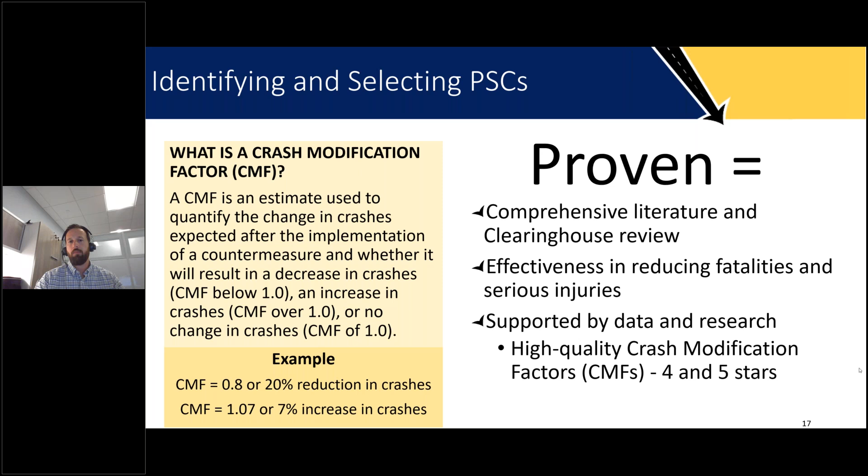For this reason, the Clearinghouse includes a system to indicate the dependability and quality of a CMF using a star rating system, on a scale of 1 to 5 — the more stars, the better quality the CMF. So for this set of countermeasures, we focus on high quality CMFs, those with 4 and 5 star ratings, which indicates they were developed through strong quality research.

Now, the PSCs align with and can support agencies with implementation of the safe system principles and elements. On the left side of the slide here, you'll see the Federal Highway developed Safe System wheel. On the inside of the circle, we have the 5 safe system elements, and on the outer ring are the 6 safe system principles.

Now, if we start to look at a few of the principles, we use this Swiss cheese model or analogy to show how the 5 safe system elements work together, such that if one part fails, there are redundant systems in place. So if we think of each of the 5 safe system elements represented as its own individual slice of Swiss cheese, the holes represent weaknesses in the individual parts of the system.

A failure — or in our case here, a fatality or serious injury crash — can only result when the hole in each slice momentarily aligns, permitting a user to pass through all the holes in the slices.

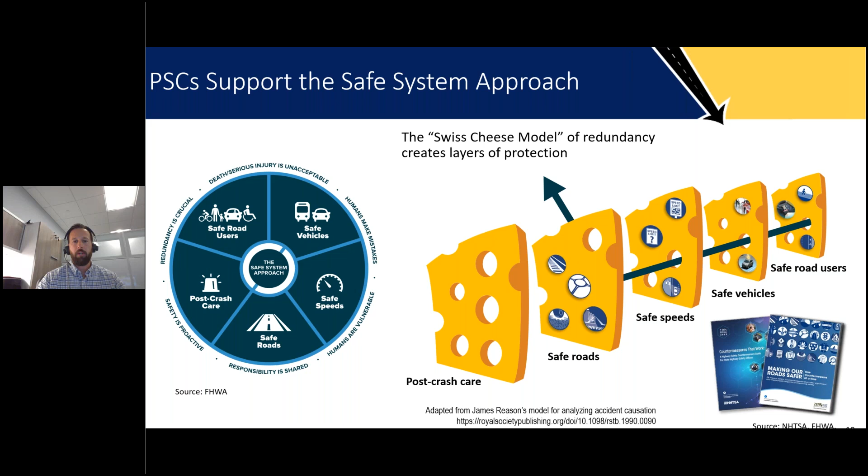So we have our proven safety countermeasures, and NHTSA has their Countermeasures That Work series. We can use these and implement them to further strengthen each of the individual elements. And if we implement those countermeasures within each of the elements, we can start to plug the holes in the cheese — plug the weaknesses in the system — to reduce the risk of a fatality or serious injury from occurring.

Now, understanding these agency challenges, recognizing the initiative now contains 28 countermeasures, we wanted to make sure we were providing the right tools and products to help practitioners find the right solution to their issues. 28 can be quite overwhelming to some agencies, and so with the most recent update we reorganized our web page for the PSCs by each of the different focus areas we have.

We also added a search and filter tool to the web page to narrow down that list based on a number of different factors that can be selected in that filter tool. And one of the staples of this initiative are our one-page fact sheets, giving a general overview of what the countermeasure is, the safety effectiveness, the applications, and considerations when implementing the countermeasure.

But we've also implemented and developed a number of other resources. We put a booklet together that puts all 28 fact sheets under one cover. We have a document that we rolled out earlier this year highlighting rural applications of proven safety countermeasures.

And just this week, we posted a new guide, so you can ignore the coming soon. I'll post a link in the chat once I finish up here. This new guide is on implementing the proven safety countermeasures in work zones. It describes the application of the safe system principles to work zone planning and design, and explains the policy and project level implementation strategies to consider and prioritize PSCs in work zones.

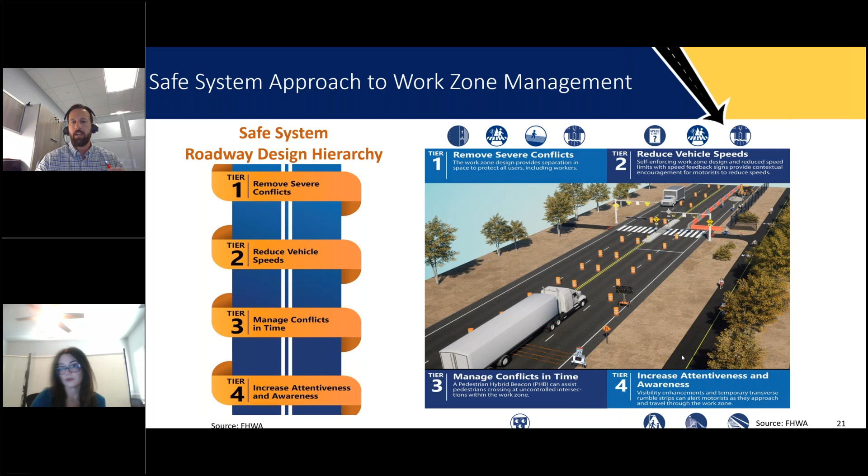Now, there are a number of different strategies that can be used to implement PSCs from both a policy level and a project level. We have a lot of policies, procedures, and guidelines that are developed and can inform countermeasure selection and mitigation within work zones. Encourage you to look through those.

Work zone process reviews, the capability maturity framework. Each state's required to develop a strategic highway safety plan. Many states include an emphasis area for work zones. Look through the other emphasis areas to determine what are the primary safety issues in your state and how the PSCs can be used to support and address those different strategies that are identified in the SHSP.

And then last, in the policy level, and probably should be first in this list, is to review work zone crash data. Look at the most common crash types and scenarios that account for fatalities and serious injuries in your work zones. And then down to the project level, we have work zone road safety audits.

Those can be performed at any phase of a work zone, whether it be planning, design, deployment, during active work zones. The graphic in the top right shows those 8 major steps of an RSA.

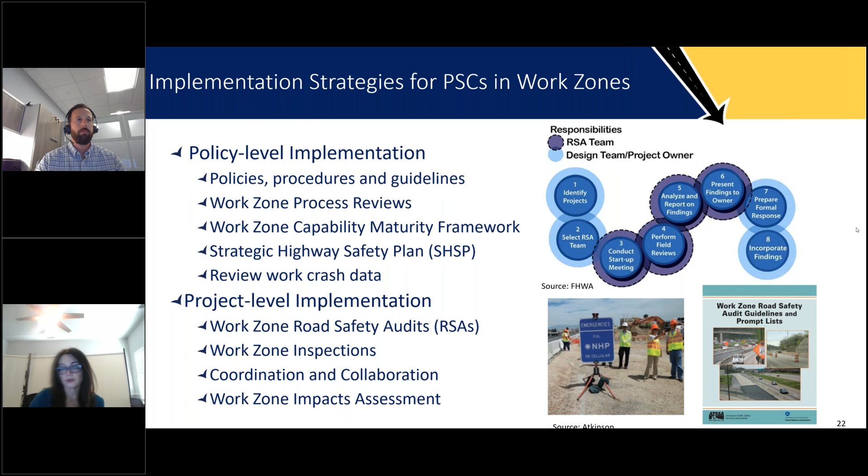And we have work zone inspections. There's a lot of opportunities for coordination, collaboration between the different project stakeholders, and then work zone impacts assessment. So you can see a lot of different opportunities to explore how PSCs can be considered and implemented in work zones. And then the bulk of the guide, as I noted, goes through each of the 28 PSCs.

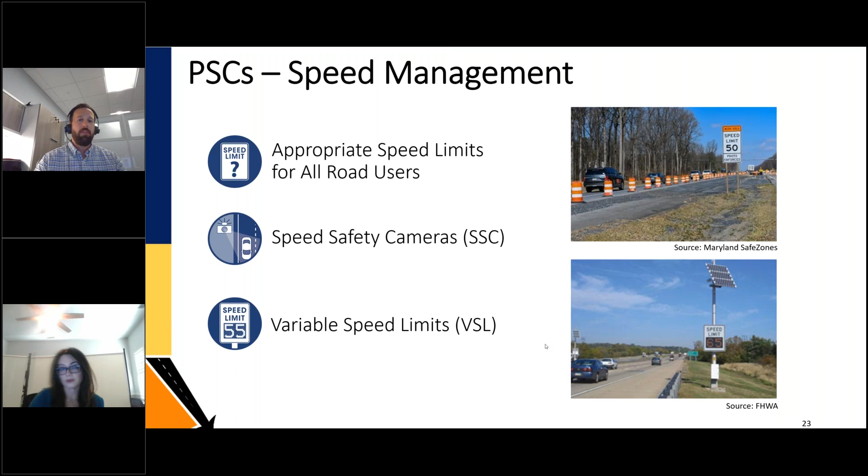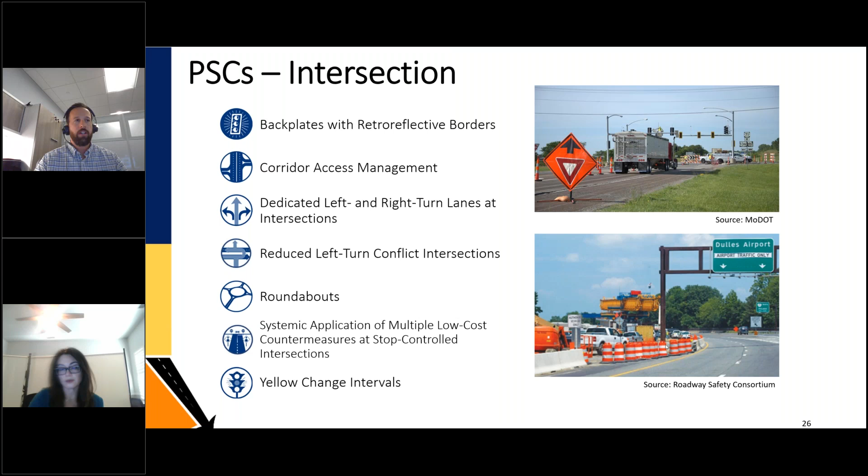I'm not going to go through each of them in any level of detail, but just wanted to highlight by focus area what we have. 3 PSCs under the speed management grouping. We have 8 PSCs under the PED bike focus area, 6 under roadway departure, 7 under intersection, and then our last grouping includes 4 cross-cutting PSCs.

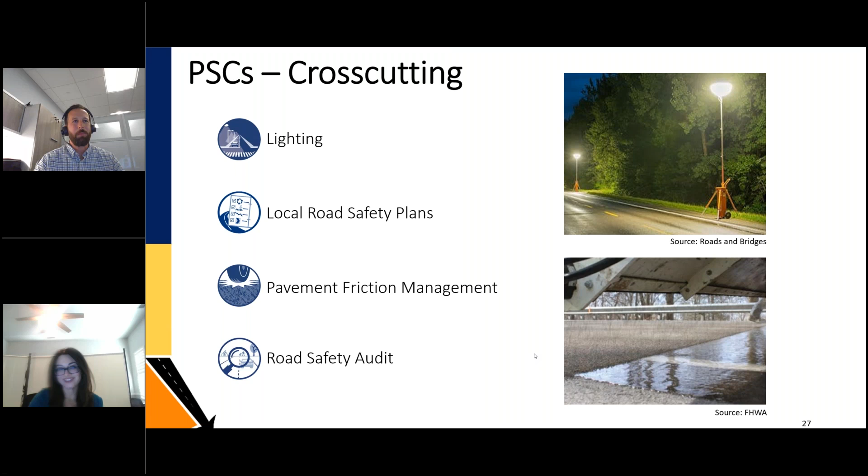I had underestimated how much time I'd given myself for the presentation, so I had a note I was going to kind of touch on one within each grouping, but in the interest of time and allowing Florencia and Chris to cover ample time to cover their material, I was just going to skip over that.

And I just wanted to kind of close with this: where to start. The guide contains a lot of information on where you can start with in terms of considering and prioritizing PSCs for implementation in work zones. Going to note just a few things here.

Look at where you are at in terms of implementation. So you can use a scale. We have the Every Day Counts scale from not implemented all the way up to institutionalized. If you're at those lower tiers of implementation, what are the barriers to implementing PSCs within your state? What do your state policies say about the proven safety countermeasures?

Looking at leveraging and reviewing and utilizing a lot of the existing information we have. Touched on the strategic highway safety plan. Look at work zone crash data trends. There's a lot of information that's already complete and available and can inform PSC implementation in work zones.

And then lastly on the slide here, I have funding. It always comes up under BIL. We do have the work zone safety contingency funds. Those may be available to address those unexpected safety concerns in work zones. So I have a link to a fact sheet that was developed just recently. Encourage you to look at that and how it might support PSC implementation in work zones.

And then lastly, I think it goes without saying, we are here to help. If there's anything we can do to support you, let us know. And then I had this final graphic basically to show we have a lot of tools at our disposal, a lot of methods, tools to inform countermeasure selection or decision-making at the project level that we all have a role in delivering. Those tools can better allow us to target investments, implementation of the PSCs, all in support of our goal of 0 deaths and serious injuries in our transportation system.

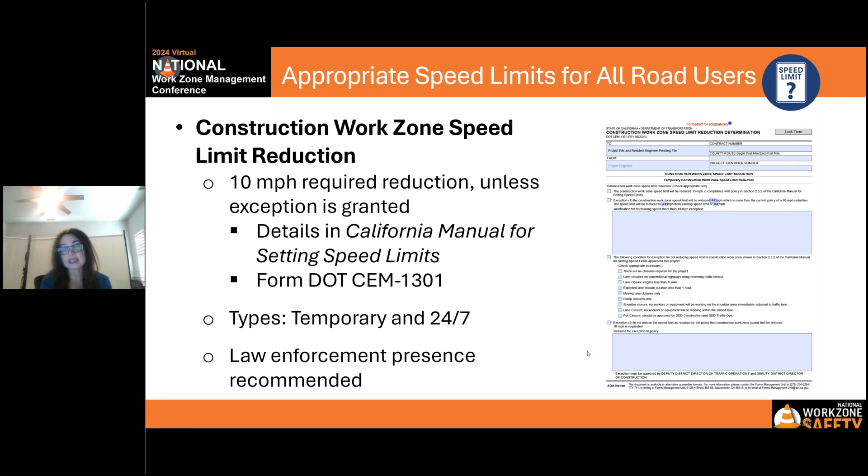One way to enforce this is by law enforcement presence. So we have in our state what's called COZEEP and MAZEEP. We actually have a contract with our local California Highway Patrol for both COZEEP and MAZEEP, the Construction Zone Enhanced Enforcement Program and Maintenance Zone Enhanced Enforcement Program. And we have funds set aside specifically for all projects to be able to have officers on site at all times. We revisit that and create a new agreement with them every 3 years.

And we call out specific times that it's mandatory that you will have a COZEEP or MAZEEP officer present at night during specific times. We will get with them and say we feel it's necessary. That's not the only time they could request it. We have funds available, so on any single job, if we feel it's necessary, we ask for COZEEP or MAZEEP. The RE will be out there and work with them, and it could look different on every single job. One, we just may need their presence.

We just may need them to drive through, make sure they're really enforcing appropriate speed limits, make sure there's no violations, make sure, just see them there. Some speed may be an issue. We may say, okay, we need you to get your LiDAR done. We need you to check speeds, be a little bit more proactive. Throughout the entirety of the job, that could change.

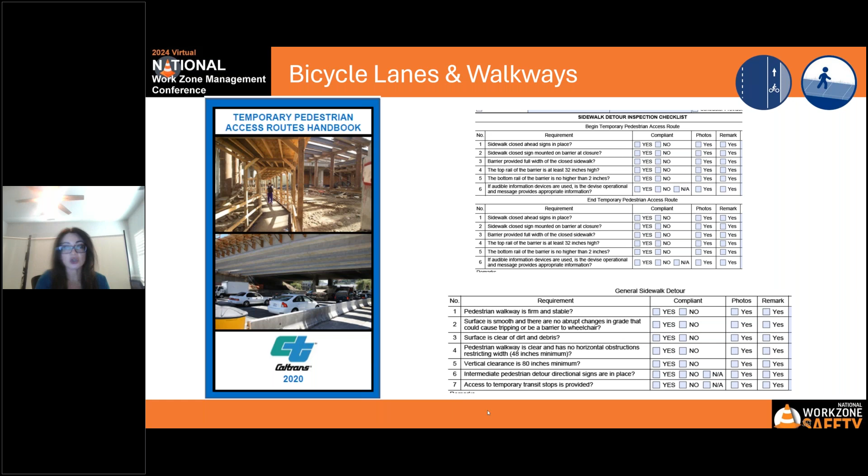What we decided to do is, hey, we're ignoring our bicyclists. So let's create a temporary bicycle accommodation guideline as well. And before, with our bike lanes, if there was a specific bike lane called out, then during early stages, the project engineer would see that and be like, okay, well, there's an actual bike lane. So now we have to provide another bike lane on this project. So it was really just case by case. If there's a bike lane, we're going to look at bikes. If not, then we don't have to do anything. So we're trying to change that.

And this guideline is supposed to come out mid-summer next year, 2025. And what this is going to do is every single project, regardless if there's a bike lane or not, let's look at it for bicycle accommodation. So we want to make sure that we are looking at all of our vulnerable road users, whether or not they had an existing bike lane. Are there bikes in the area? Do we see people utilizing them? Even if there's a few, what are we going to do to get them through?

There doesn't necessarily have to be a called-out bike lane for them. It could be maybe just a bike path. We want to make sure that they could get through. And sometimes there isn't a way to provide a detour. What else can we do? Can we provide a shuttle for bicyclists?

This was a really big thing because especially a lot of avid bicyclists, they have really expensive bikes. They don't want to use a shuttle. What can we do to help get them from point A to point B? What type of bicyclists do we have that we're trying to accommodate?

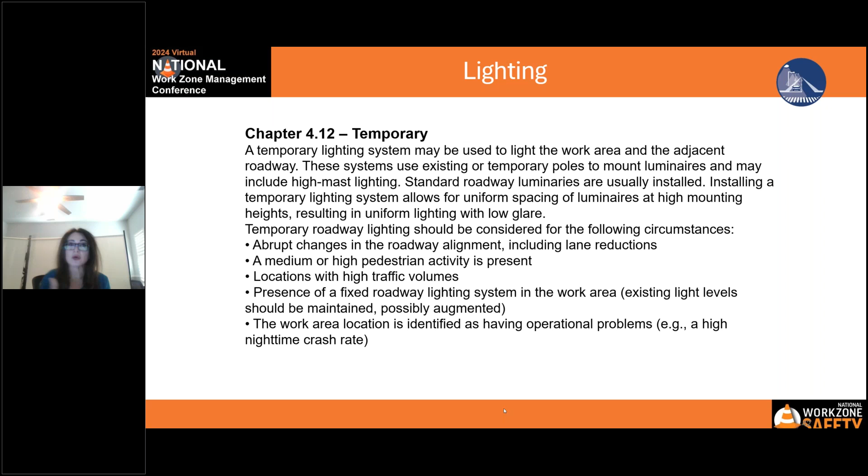So in this project, the traffic was temporarily shifted into the median, which was fine, and it was near the off ramp, and we kept the ramp open, and that ramp stayed illuminated, so it was fine. But what was caught is, well, once you do the realignment, you're now going to create a shift in the divergence point. So we need to illuminate that. How are we going to do it?

So we had to work with electrical to make sure, obviously, we wanted the same levels of lighting in that temporary area that we had in the permanent area that remained open. So in this case, we had to have lighting on wood poles, and we just installed them right there at the temporary divergence point, and everything was right and dandy. But that's just an example.

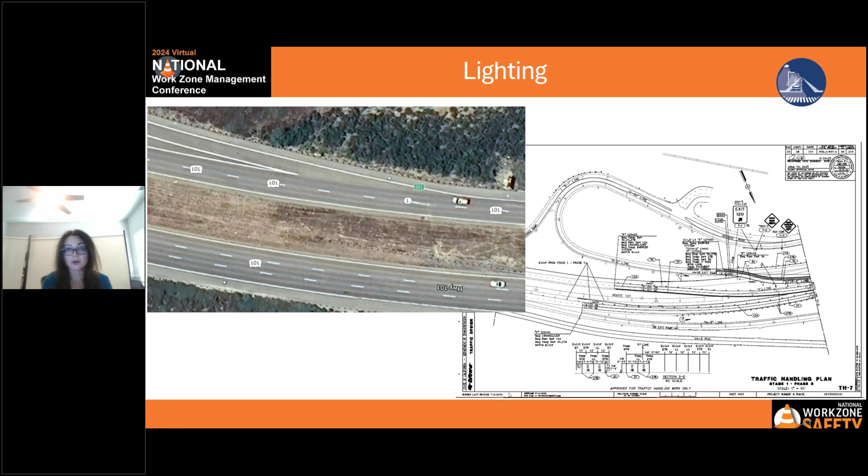What we do is we look at every single project, whether it be temporary or permanent, and we really try to make sure that we're getting the right people involved to keep these proven safety countermeasures intact. So thank you.

All righty. Well, thank you for leading those off. So I'm gonna kind of finish it up and close it up here. One of the things that I wanted to do was really get into some of those practical examples and really show how and what we've done in Michigan with those. So it's going to be a little bit more of a lightning round overview of all the things that we've done.

Some of the things that I'm going to try to cover today are some of the things that we've done with our temporary pavement markings. We'll focus on those a little bit. We've done some different things with traffic regulating or flagging, looking at AFADs, some different things about locations and where to stand. Getting into some of the rumble strips and showing some different applications of how we use those in Michigan. And then just some other general things that all tie in to the proven safety countermeasures idea. They may not be directly listed, but they're simple low-hanging fruit things that really do add that safety.

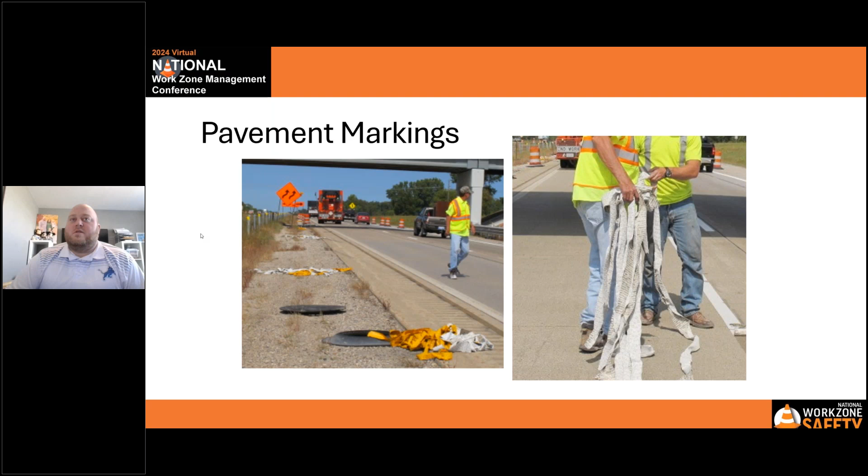So we really looked at that, and our contractor challenged us to challenge industry to come up with some new tape. We did a couple of tests side by side, and as you can see in the picture, we had them out there, and the improved tape, which has a little more of what they call scrim or internal webbing, really lasted longer in areas like this where we have roadway defects—crack sealing, gaps, joints, things like that—where normally someone pulling this up would have to stop and deal with it.

There are a lot of videos online—if you Google that, or email me, I can get you some. For the sake of time I didn't want to put one in here, but we were on a project and found how much faster this tape removal goes. When we extrapolated that out, improving this tape and speeding up removability meant, for example, 10,000 feet that would take about 3 hours to peel with our old tape was reduced to about 30 minutes.

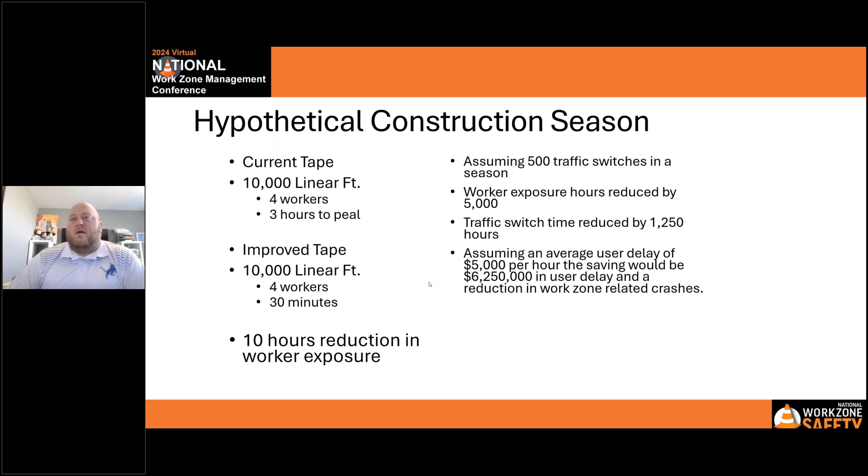So we're reducing worker exposure and the time we're out there with lane closures. We figured that if we were doing 500 traffic switches a season—which is probably low considering all the work we're doing fixing the roads here in Michigan—that reduction extrapolates to over $6 million in savings, just in user delay cost from having traffic move, not to mention the reduced worker exposure and the risk of not getting hurt and not being exposed to traffic. So that improved removability tape is something we're really proud of at Michigan; we've had it in place for a couple seasons now and have seen a really big reduction.

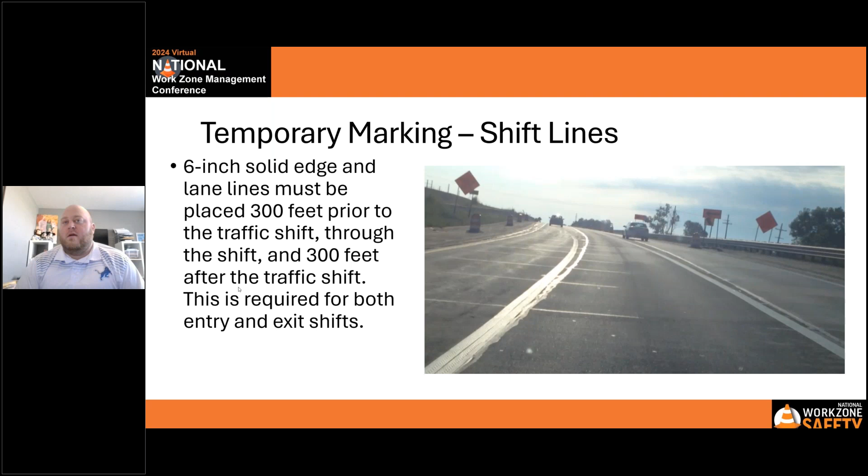This is one we missed in the design because it was still kind of new, but it did a really good job of highlighting what it looks like when it's not there versus when it is. It's kind of an unnoticed thing, but it really prevents side swipe crashes at merge points, and allowing people to stay in the lane really adds a lot of benefit.

A super simple one, but very effective, is signing your access points. We sign things for the motorist and general public, but a lot of times how our construction staff get around on our projects can be difficult. We have a lot of trucks coming in and out of our projects, so on some of these that are maybe 5-10 miles long, we put up access point signing.

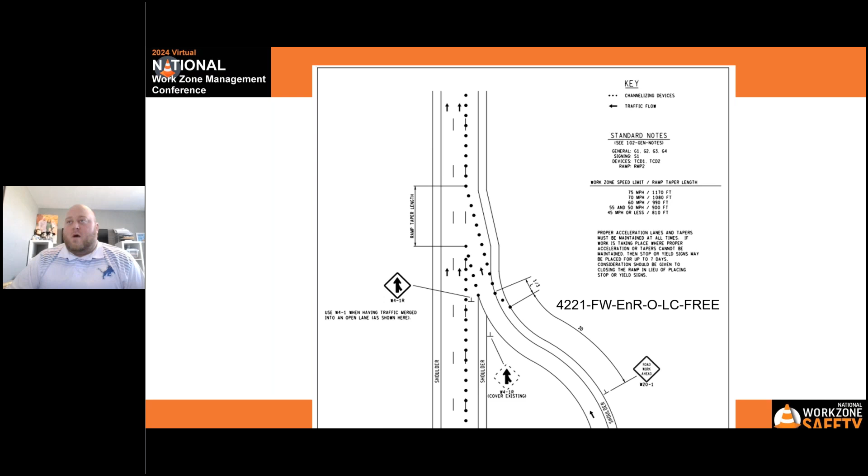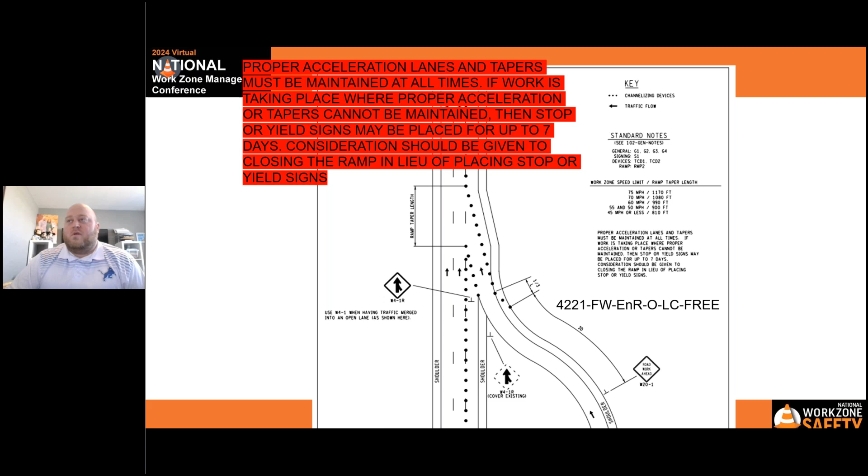How we handle our freeway entrance ramps is one we really worked a lot on, making sure and driving this point home that we have this in place. We actually state that if you can't have a proper acceleration lane and you do need a stop or yield sign, we should give consideration and think about closing that ramp for a period of time prior to doing that. We always want to try to get that work done and not have a stop or yield up for longer than 7 days if we do need that in some circumstances. But in those cases, we would try to close it and avoid it.

The reason being is we saw a lot of things like this where you're yielding on, you're merging on, and really there's no work going on, so there's no reason to have this closed. They could have built in that taper and matched the existing conditions, giving motorists those distances, because when you don't do that, even if you have it signed properly with yield aheads and things like that, if you don't give them enough space, you still run into the issue of crashes that can occur at points like this.

So just making sure, it's not a direct proven safety countermeasure, but making sure we're designing our ramps correctly and giving enough space is definitely something we can do to make our work zone that much safer.

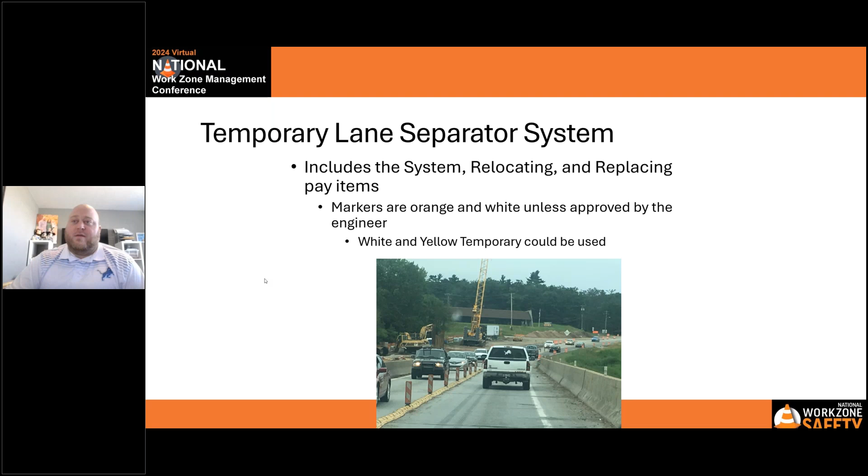Up in the Upper Peninsula, across US 2 in the Escanaba area, we had this out there for multiple seasons and also had to remove snow around it. What we realized is it still functioned over the wintertime. The snowplow drivers just stayed a little bit away from it and really salted that. But that really worked, since we had a railroad bridge that was a multi-year project and we really had to maintain traffic over there, so this allowed us to keep that traffic separated using this system.

This is also something we've utilized on other bridge projects, or just in areas with a lot of high volume where there might be potential intrusions into the work zone, and you just want that little bit of added protection that really does give you a more defined area where motorists can't necessarily cut through. They can still cut through because those delineators pop down, and they pop back up if they get hit, but it doesn't promote it as much as a space between a drum where someone can try to pull into the parking lot.

Simple but effective, reflective stripes on your temporary signs. A lot of times you're out there at night and may not see or be aware of those. Just putting those reflective strips on those panels really does make those signs a lot more visible.

And then rumble strips. We have a couple different ways that we use temporary rumble strips. If we're ever changing a stop condition, we have a layout for that. So if we have a temporary detour route and need to change a free-flow intersection to a stop condition, we really want to make sure we're alerting those motorists, especially ones that have been driving there for years and never stopped at this intersection. All of a sudden, for the next 3 months, they have to stop there. We're changing the traffic pattern, and this really does a good job of highlighting that.

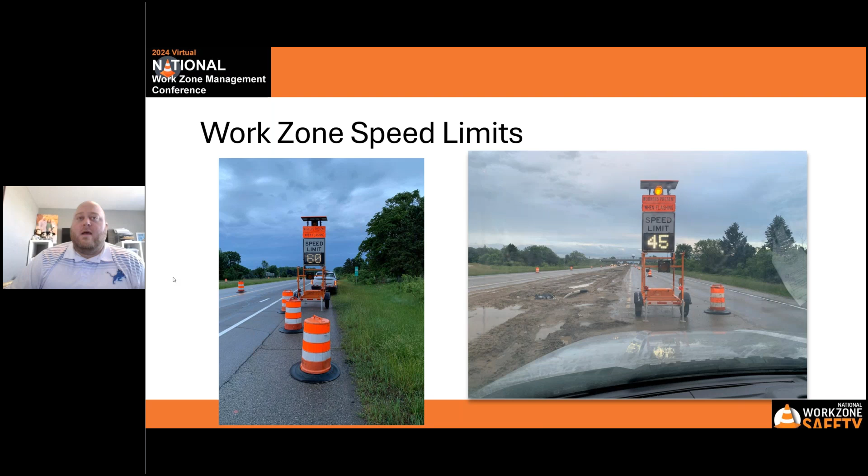Getting into speed limits—Valencia touched on this a little bit. One thing we're doing specifically in Michigan is a workers-present speed limit, and there's always a big discussion about whether the workers are actually there: when do I have to slow down, when do I not? So we're looking at utilizing digital speed limits with flashing lights when workers are present, to really help improve compliance.

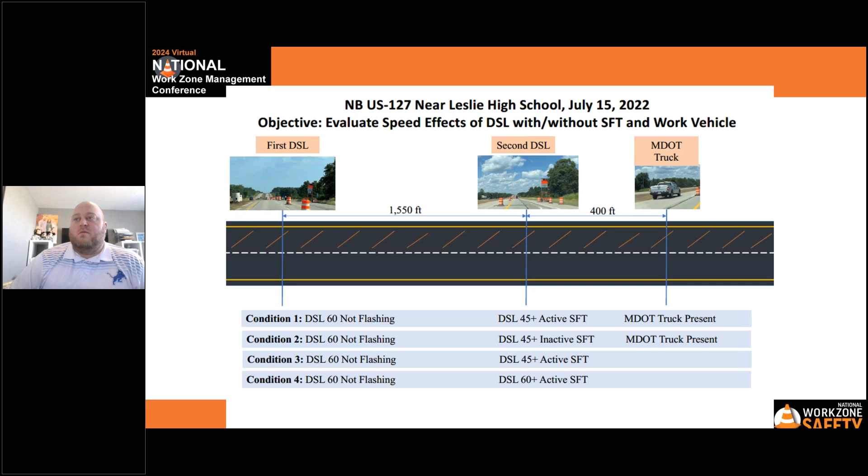We actually did a study on this through the Smart Work Zone Deployment Initiative, or SWZDI, and Michigan State helped us out with it. We looked at having these out there and how effective they are in relation to actual speeds. What we realized is that when they're out there and there was a work truck with a light on, we saw a higher rate of motorist compliance slowing down to that speed. They're not getting all the way down to 45, but comparing when the DSL was active without a truck present versus when there was an actual worker there, you can see how effective those signs were versus just being out there on their own. So we saw a lot of positives with that, and we're working on exploring it further.

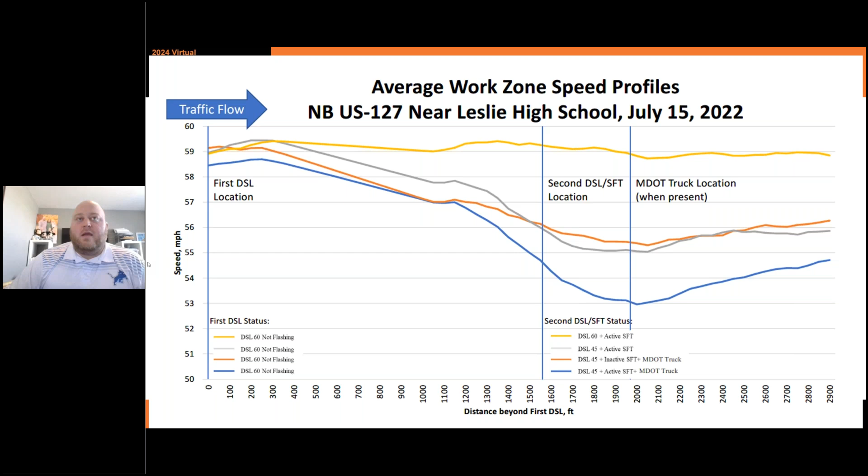So we do have some upcoming items with that.

And then too, just as we highlight the speed safety cameras, I know this was talked about by Martha, Juan, and Kyle on the first day, but this is something we haven't been able to do yet in Michigan. We're still working on some legislation, but the numbers on those cut sheets that Phil talked about really give you an idea of how successful and accurate those are.

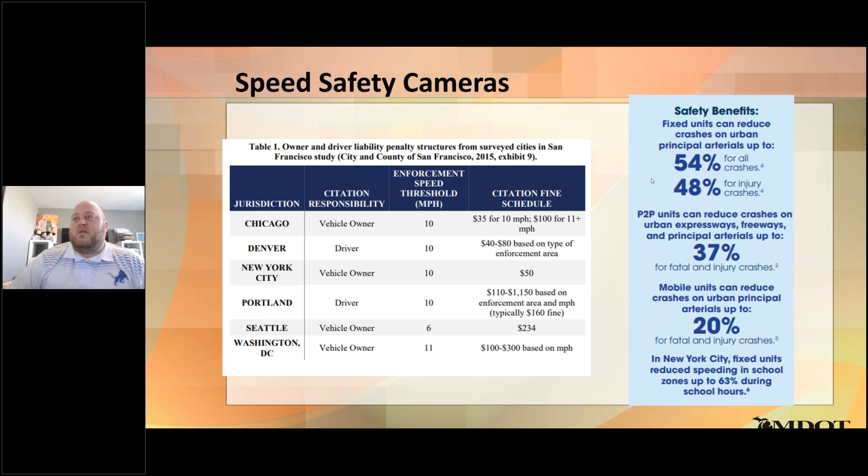If you saw me present on the commercial motor vehicle side of things, this is something we're expanding in other areas, looking at mapping where our workers are via some devices. But I always like to say, that's kind of futuristic, but what can I do today? What can I do tomorrow?

If anyone's ever used Waze, if you're out there on a road site, you can go on there and click the hazard button. Now I don't even think you need to click 'on roadway.' This is a little older, it's a bit different now, but you click on road and then click construction, and that will mark and map you as someone out there if you have your device. We're trying to make that all automated.

And then two, what we're working on is actually trying to have our worker presence change our speed limit signs. We had a project on our I-96 corridor where we were doing concrete patchwork and some paving, where we had digital speed limits set up, workers with sensors, and when they were in those segments, that would change that sign automatically. Then when they left those segments, those signs would go back up to 60.

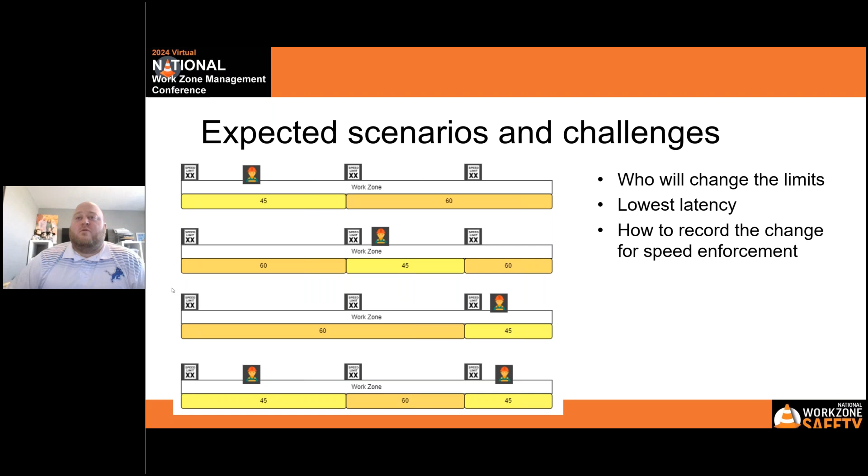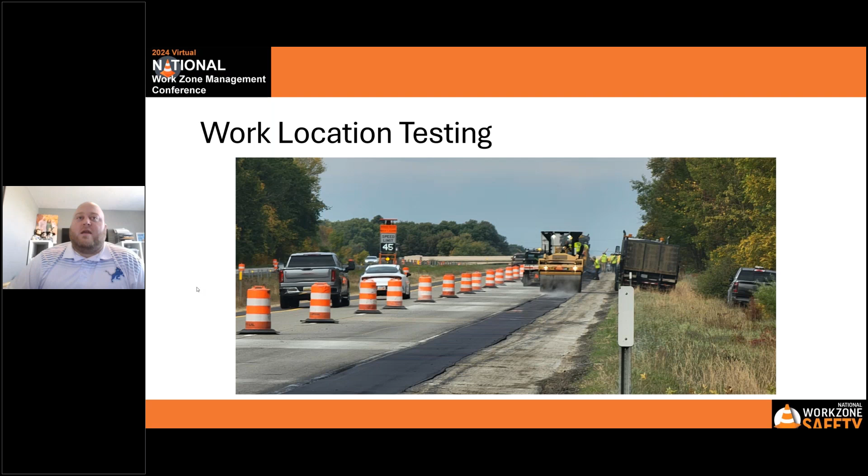So those are some of the things we're working on and testing. Here's an example, where once that work crew passed the sign, that would then go to 45 flashing, and when they left, that would go back up to 60. So we were giving that motorist real and accurate information, so they're more likely to be in compliance when we're giving them valid information.

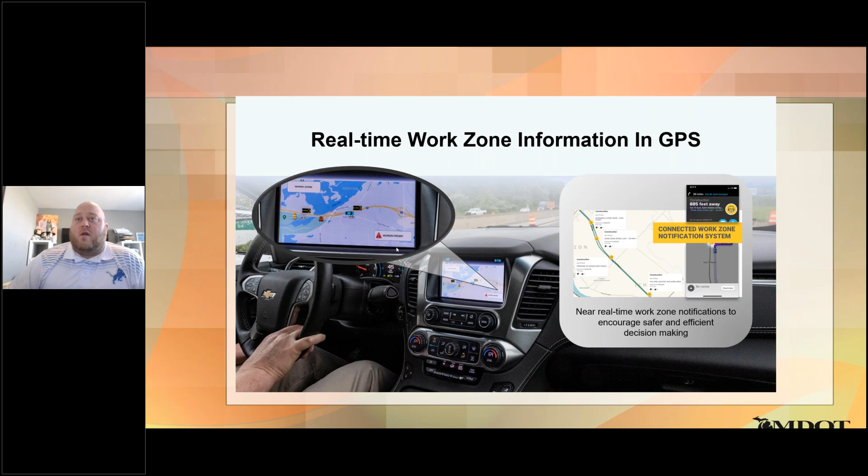We're doing that through the WZDx vehicle-to-X communication, using all that WZDx information to do all that. And that is once again connecting into those vehicle dashboards long term. Hopefully in the future that speed limit will be up there with an alert or notification saying that workers are present. That was one of the tests we did with GM.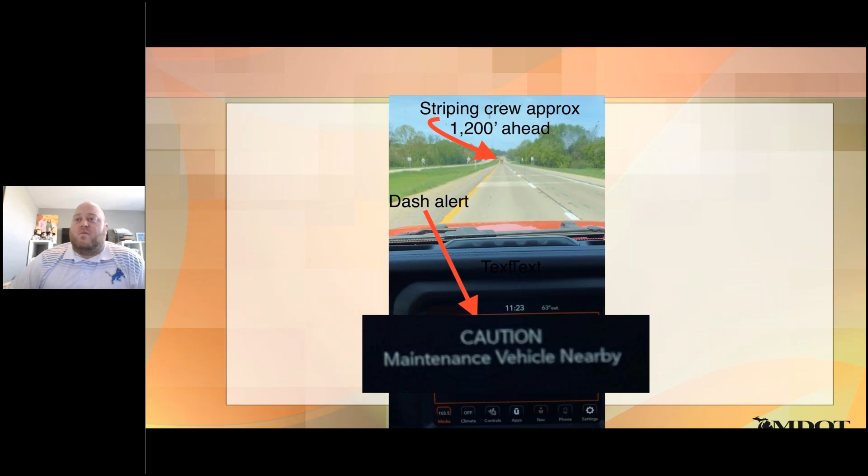And this is another example from the projects from the CV grants that we talked about on Tuesday, where what is happening right now, and can happen, is if your vehicles are equipped with a connected device, those alerts are actually coming into in-vehicle dash alerts today, saying there's a crew ahead, if those companies you're working with have that connection with the automotive industry. So this is happening today, and it's definitely taking off and going to be more active. I know there was a session yesterday with HAAS and Wanco talking about some of this technology too, so it all kind of blends together and works with what we're doing.

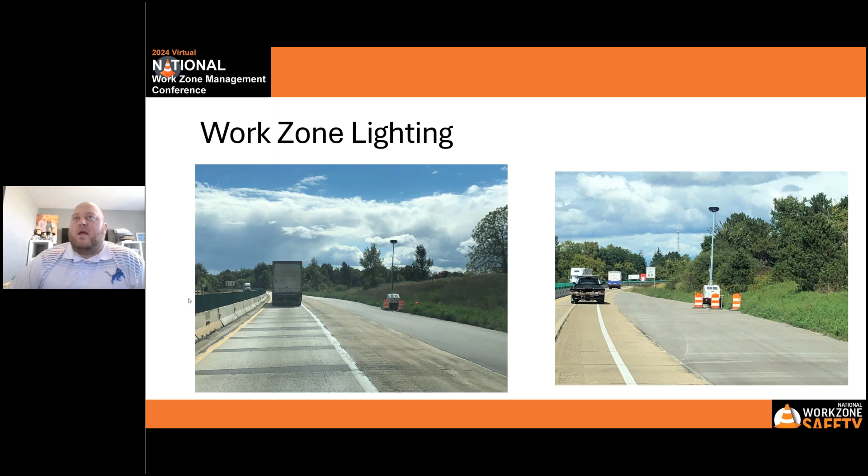One of the other things we're doing is with our work zone lighting, taking a bit of a different approach I wanted to highlight. We're looking at illuminating our work zone pull-off areas. As you'll see here, this is one of our projects with one lane each direction. There's not a lot of area to pull off, but we build in emergency pull-off areas. So if your vehicle breaks down, we had those be lit areas, so that if you pull over and break down, you're not out there in the middle of the night in the dark. You can actually see, you're safe and marked, so motorists traveling down that roadway could see you.

There is also another smart work zone deployment initiative project that just got selected, and we're right in the kickoff stages of this, where we're going to start doing this and put that out there. There'll be some new research coming out on the effectiveness of nighttime and worker visibility through that.